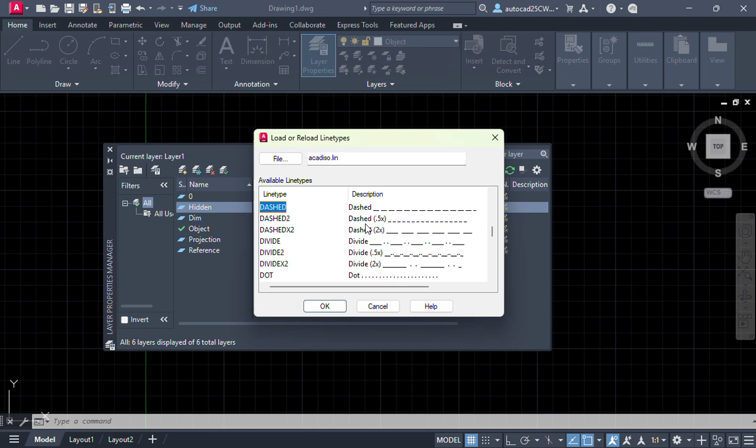Okay, so you can set up colors or whatever. In this case I'll stick with, just for the hidden line, change it from continuous to hidden line. So load, find hidden dash - let's say I take this dash 5, then okay, select this, then press OK. So this is only for hidden line, it uses dash line type. The rest stays on, so we'll select default first - see it will tick, meaning we'll use it by default.

So I'm just going to stick with 0 first, later we'll assign it. Layer is very important, later you'll understand why. So the next thing you want to do is draw the reference line. Orthographic has a reference line, so it doesn't matter, you just draw it roughly.

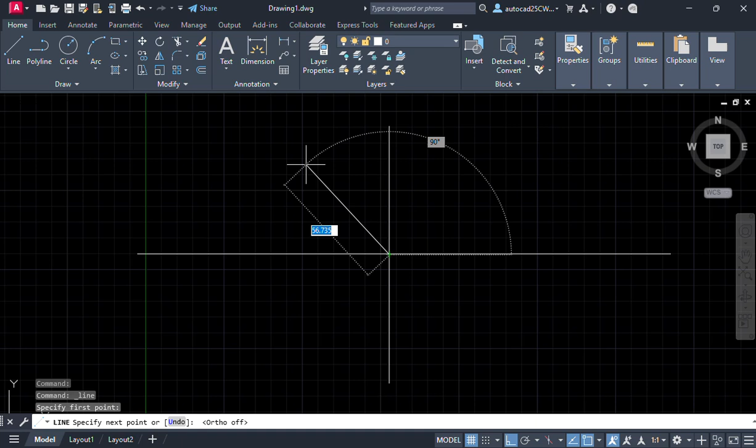Okay, F8 here. Next you want to draw a 45-degree angle here, over here. In orthographic, those who know will know there's this 45 angle drawing for us to make the projection. In order to do that, you can just click line and then select this. Make sure you turn off your F8 orthographic so it allows angles.

So you can use '@', give something, let's say 120 - this is the distance. And then give the angle - see this symbol? The less-than sign - you have to click on your keyboard, the shift button near the comma has the less-than button.

So it's not less-than, it's actually representing angle in this context. So how much angle do we want to put? In AutoCAD, if I'm not mistaken, we try and error. For counterclockwise - if here is counterclockwise, the angle is counterclockwise from here to here - it will look at the rotation from the positive X angle.

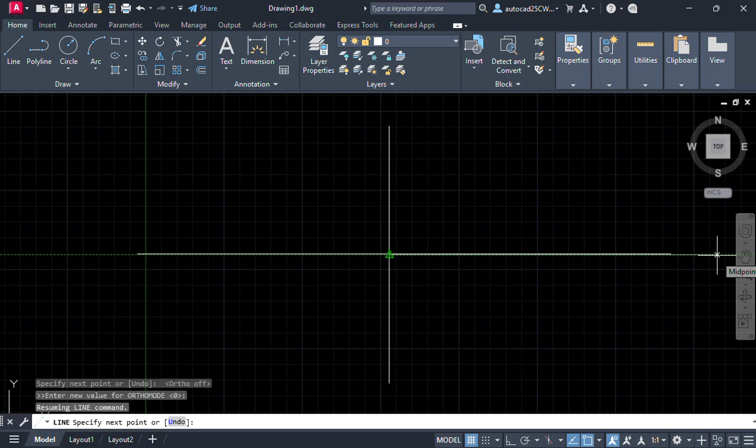So if you want to go here, you put 90 plus 45 equals 135. From the X axis, positive X axis, the angle is 135. Or if you want to use negative, you put negative 45. I'm assuming that's the correct one, so I'll use negative 45. Let's try and enter - okay, can't see it? Negative 45 means it goes to the positive side here, that's just below, so then we have to try something different.

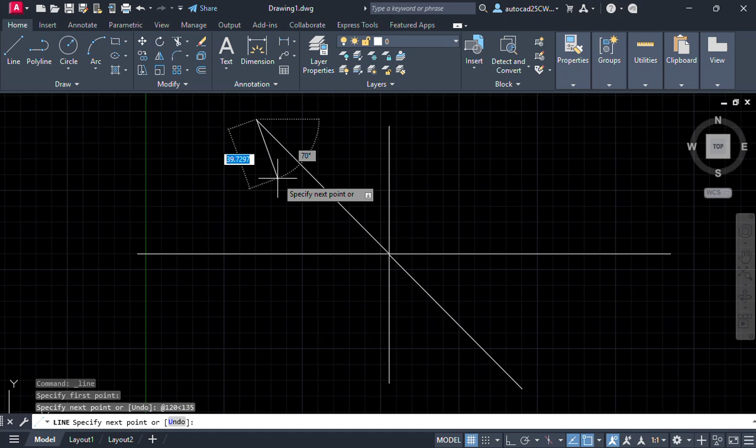So it's really based on the X positive axis. The angle should be based on the X positive axis. So kalau negatif maknanya dia clockwise, counter clockwise from the positive X axis.

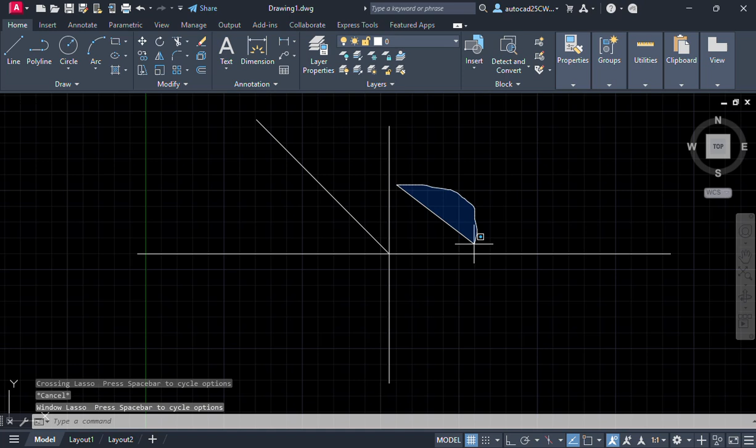So tadi saya letak positif 135 kan. Dia akan naik counter clockwise dari sini pergi sini. So that is 135. How do I know 135? This one you have to learn lah, kena ingat balik perpendicular angle 90 degree. You nak 45 sini, so 135.

Okay, now just want to double check. You can click on the annotation, and also check the angular. You can double check, click this guy here, this guy here, so you double check 45 darjah. Okay, alright, cool, are you good?

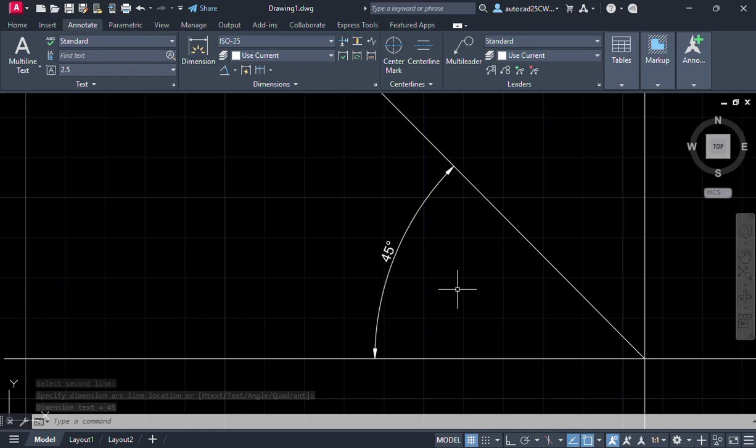Okay, so just for the dimension, I'm going to show the basic. I've shown you in the last videos, but just a quick reminder - make sure you double check, make sure your dimension here.

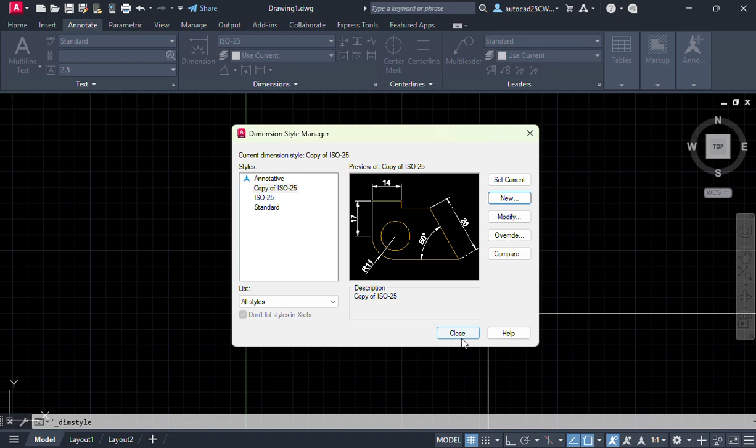You click annotate, click here this button arrow, small arrow here, and make new dimension, just make a copy of ISO, and continue. Then make sure you select your precision 0 decimal place, and that's all, that's it, just use copy of ISO.

Okay, I just want to double check, kita tak nak ada decimal. Kalau tengok dalam kita punya latihan pun tak ada decimal place.

Okay, thank you, alright. Before this you only given here - untuk soalan ortografi awak diberikan isometric punya objek, and then you have to buat semua kerja kan. So this one is not to test you that, this one to test you the AutoCAD. So basically awak hanya redraw balik saja, your task is only to redraw only.

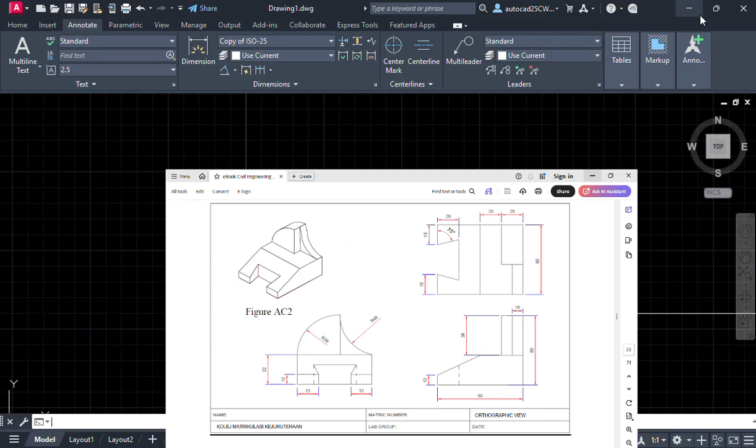So this is memang perlukan juga kemahiran awak tengok ortografik. Dimension ni semua berkait, they are all, you can read them all together. Okay, so the challenge is not, I think it's not the AutoCAD part, but really is your understanding of how to read the drawing, sebab kerja awak tiru sahaja. And all the information ada dekat gambar rajah dalam manual lab.

So now we want to draw a line. So kat mana letak the first point? Doesn't matter, you decide. So let's say saya letak kat sini. Kalau tak muat, kita ubah lah. So let's say I put here. Make sure you on F8, orthographic mode, ortho mode.

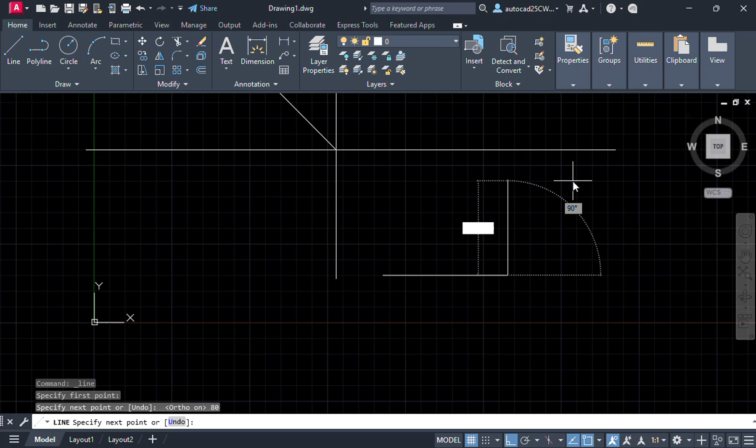Supaya senang, letak 80. Okay, and then naik 22. Spacebar again, naik 12. Okay, so this one naik pergi sini 40, 20, 20. So I prefer to put 20 first and then 20 first, sebab senang kerja kita nanti, and then dia akan pergi kat sini lah.

Easy, so just redraw everything, make sure you know the dimension. Okay, the next one you want to add this guy here. Berapa kenaikan dia ni? 38. So ada dua ni, 10 dengan 10, 10 dengan 10, 38.

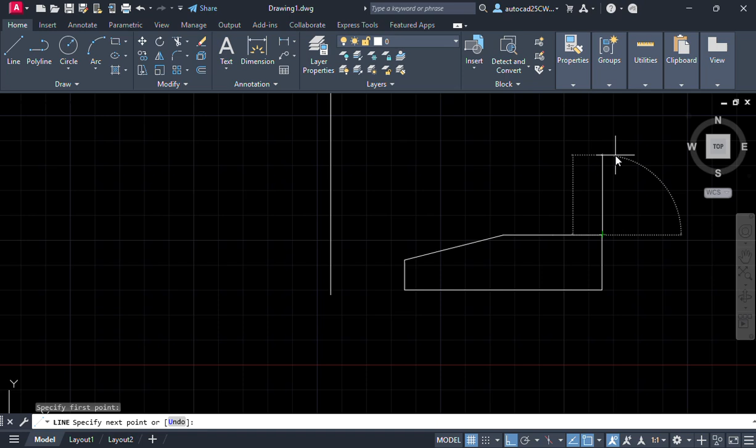So klik sini, buat line, naik 38, move to the side, 10, turun sini. Okay, and then another one, 10 kat sini, and then turun sini. See? You already done dimension. Buat the dimension part, you do the last one. Okay? Right, so siap.

Don't forget to buang yang tadi tu, yang overlap tu. Kenapa saya buat overlap tadi? I just want to get the reference, so that saya senang nak buat. So this is how you play around lah. Okay, now you dah siap sini. So this guy here, you jadikan dia sebagai object line. Select your layer, change it kepada object line, sebab this object.

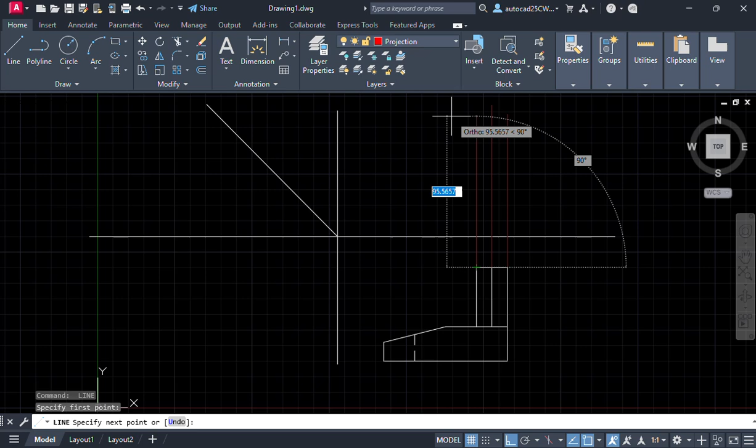Right, so next we will start making our part up here. I'm not going to show you all the details. You can try the rest yourself. I just want to show you a little bit of what you can do.

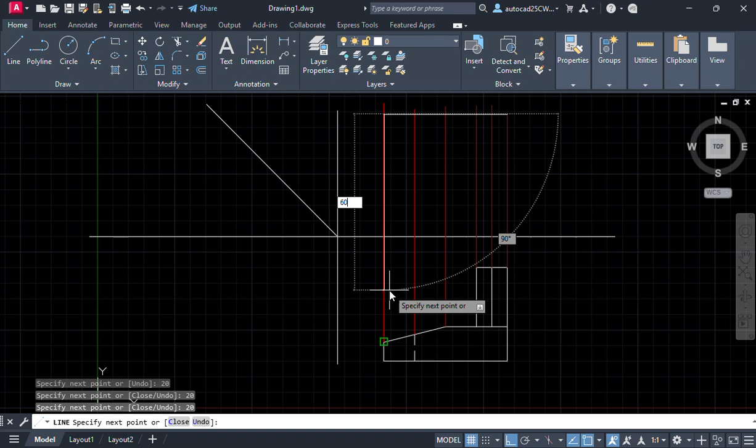You can also say, can I just do 80 directly? Yes, no problem. Okay, what's the width? So the width is... sorry, 60, let's just say 60. So you go down 60, and then you go back here, 80, and then connect here.

So you get all this line. Okay, why did I make a layer? This is where, if I turn off the light icon for this projection, let's see what happens. So we can remove the projection line. So projection line is just to project, just to show the projection. That's all.

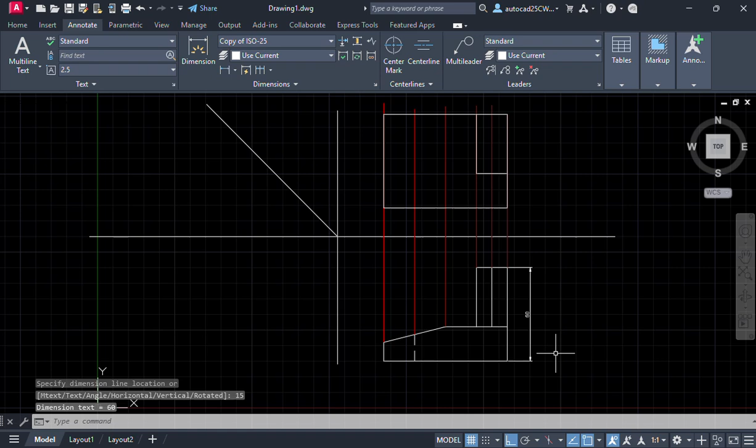So pick annotate, select either one you want. Let's say you want to show linear, okay, you want to show from here to here. Give the standard distance, I usually take 15, 20. Look, so you just put down 15, it will find a distance of 15. Same here too, 15, drag down, put 15. Enter, it will find it, see?

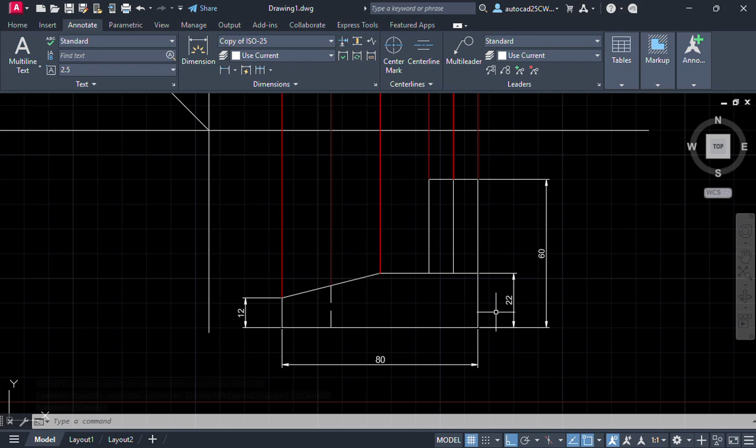So that is how you play around. Okay class, so I'm going to leave you here. This is the part. So for the rest, later when you're done, basically simple, go to layout, remove the viewport.

Okay, make sure your title block has changed the title, changed the date. The title block you got from the template earlier, change the title first, the date and everything, and then insert it as usual, select your paper, plotting all the same, standard. So that's why I said, if you are able to do it once, later on for the same thing, same layer, same setting, same dimension setting, same limit setting, same page setup, same viewport, and so on.

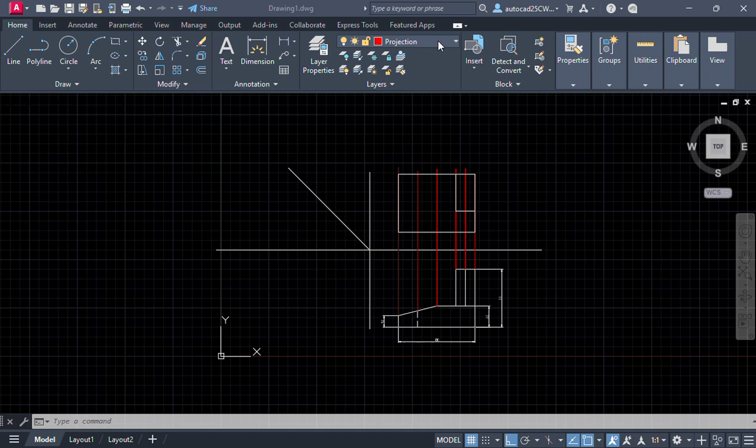Okay, and then finally, before you submit, okay, before you submit, you only need to turn off which layer? Okay, switch off projection, switch off, sorry, loading. Okay, because here. Okay, switch off the projection, turn off the current layer, and then also the reference.